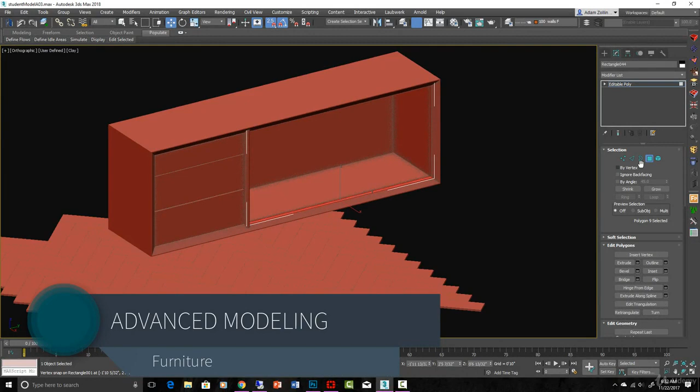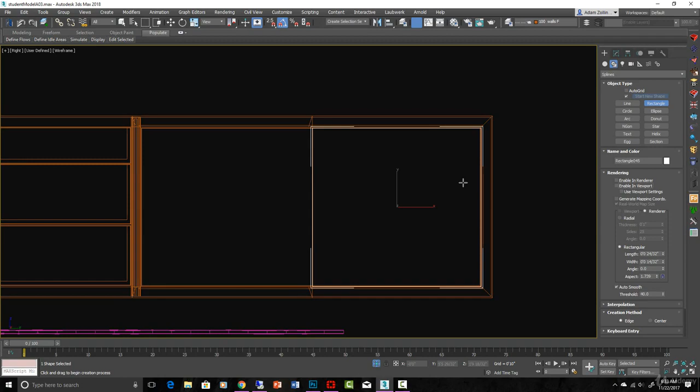All right, we were in the middle of putting on some doors. Let's do that, should be pretty easy. Let's look at our picture real quick. Okay, so we just have doors going each direction, simple piece of hardware, and then we just need to do the legs and we're there. It's a pretty simple piece of furniture to get started on, no organic shapes, everything is hard lines, but it's a great way to explore all the different poly tools.

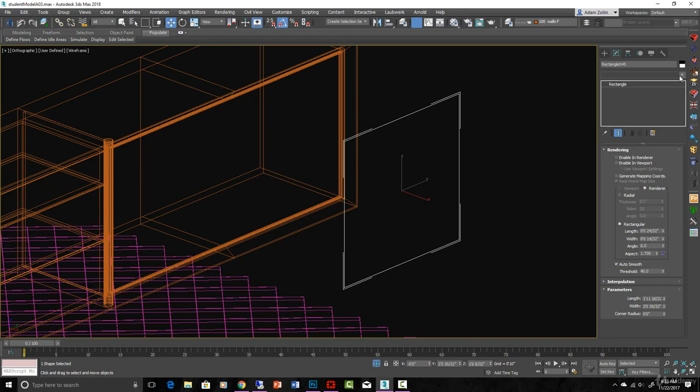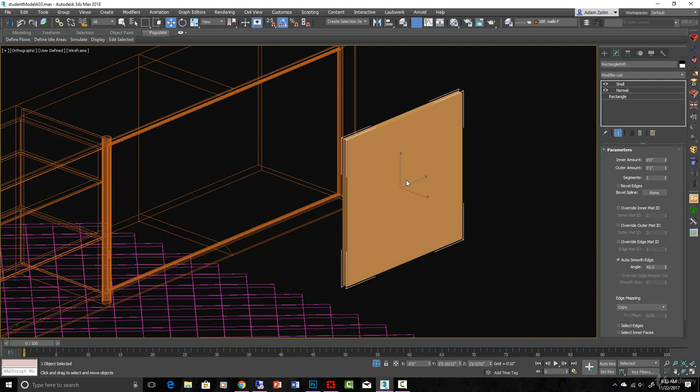I'm using spline tools to start my creations as well. So this is just a rectangle, and turn off the enable rendering in viewport and in renderer so that it's just a spline. Then there's a couple different things you can do: you can extrude it or put a normal modifier on it. Those are found in the modify panel. Let's put a normal on it. We don't want to flip the normal, we want it to stay that side, but that turns it into a shape. You could also just right click on a rectangle and convert to edit poly. Once it's just a face sitting there in space, we can put a shell on it, and there's our door. We also could have just extruded the rectangle to make a door, but either way, let's use that because it looks great.

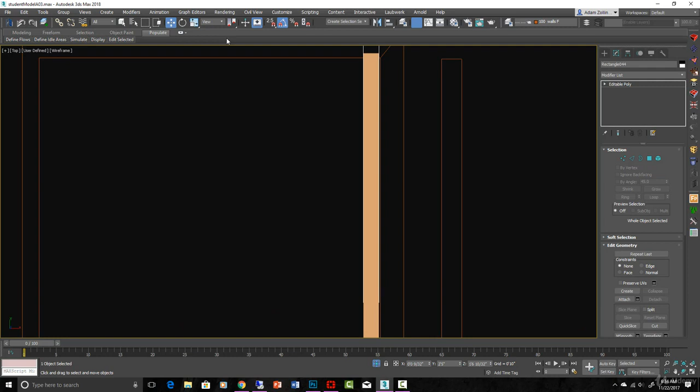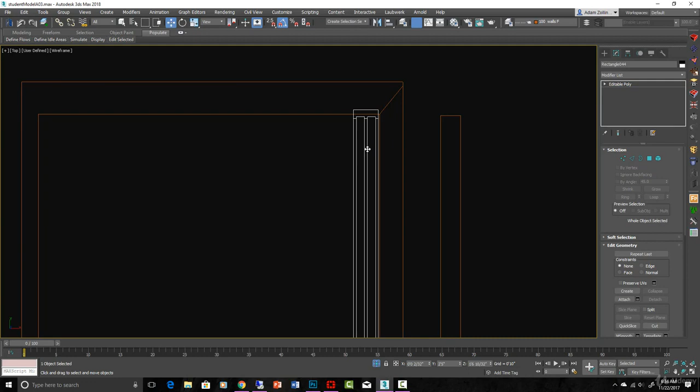Now it needs to fit into this groove that we made here, and I'm now looking at that thinking the door is not thick enough. So what we can do is, of course, just scale it. You could go into the vertex sub-object mode and select the vertices you want and stretch them over. I'm just going to scale it in sub-object mode in the x-axis only, like that, and then move it over into place. Make sure that door is thick enough.

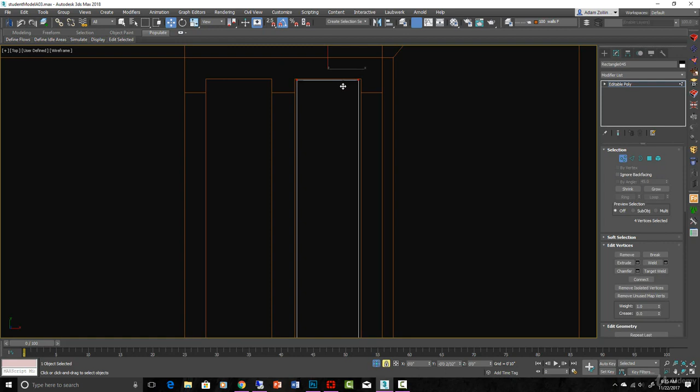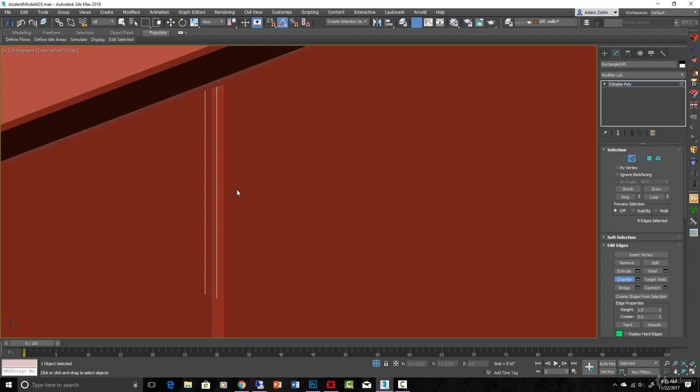That looks thick enough. Okay, so let's turn this door into an edit poly. Now we can make it the exact size we need and just put it into there. It can be a little bit smaller, so that it doesn't fit absolutely tight into that groove, because that wouldn't be right. Move it in the y-axis down, make sure it's just sitting right in there. Perfect. And we can again put those micro chamfers on the edge, just for consistency. Again, we went to the face, selected it, then control to the edges to select all the edges connected to that face. Just the slightest of chamfers.

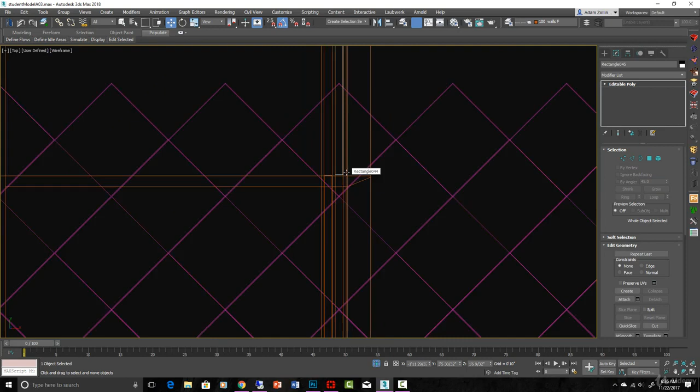And then we will hold down shift while we copy this guy over, and it should be an instance. Actually, you know what, it's probably not an instance. Well, maybe it is, I'm trying to figure out how it would work here in the center. You're not going to have a gap there, so this would be a little longer than to the halfway mark. And since these are instances, that one now just got longer over there. So if we just move that down like so, now we have some overlap there right in the center, which I think is exactly how it would work.

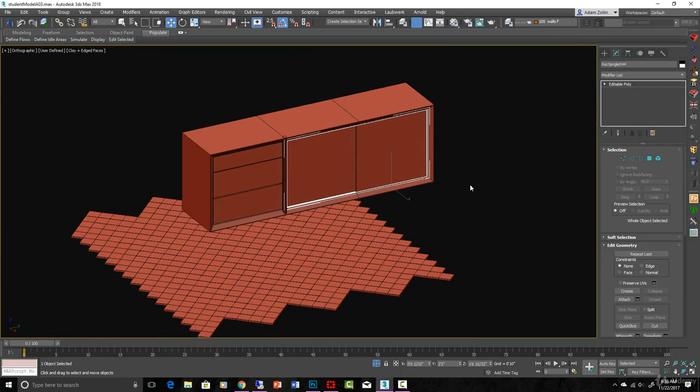There you go, we've got it sitting in a track. If anything, you could make that track a little thicker and the doors a little thicker too, but I think it's okay for now. We'll have to see when we render, I guess. Now the hardware is luckily super simple. You'll find that modern furniture is oftentimes much easier to model than traditional furniture because there's not a bunch of curves and things like that on it.

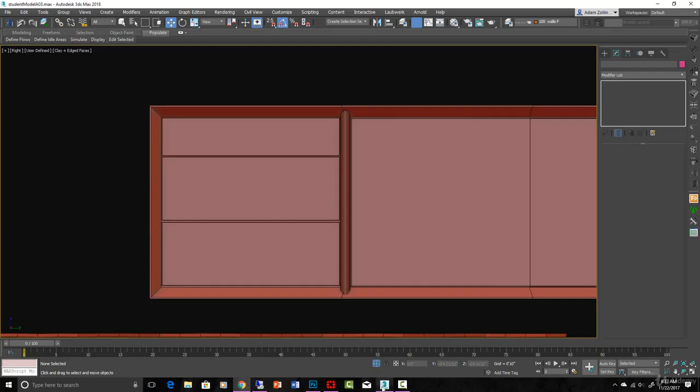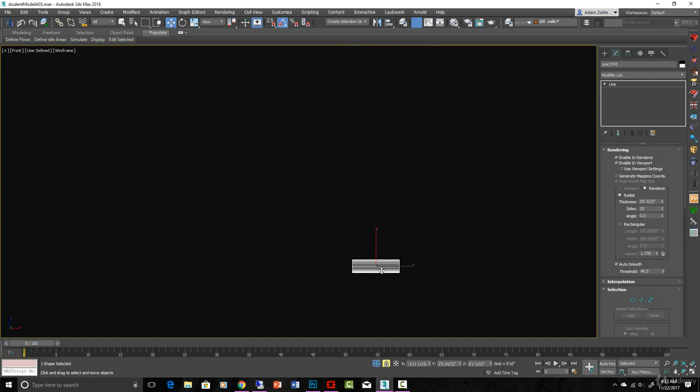Let's check this line right here to make sure that's right. Yep, that's right, the drawer goes right up to it. Okay, so the hardware can be very simple, we could probably just make that with splines. Let's take one of these doors to be right about there, and we'll just make a spline coming out like that. Let's look at it from the other view. Well, let's leave it down here so we can see it, and just go to the modify of that spline and enable it in renderer. Radial, of course, make it small, something like that. And then we can convert that to edit poly and take that as an element sub-object, and copy it up.

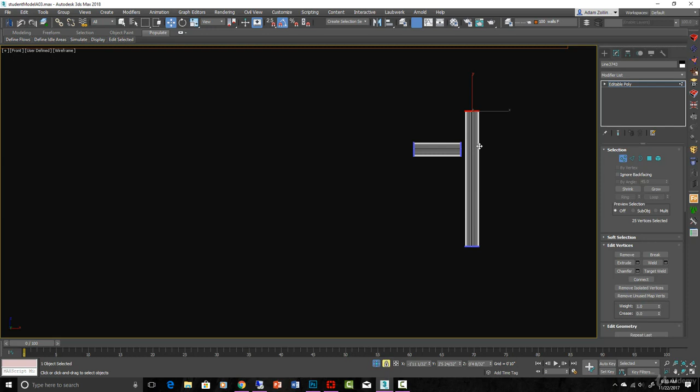And then let's move it out here, holding down shift to create a new element, rotating it 90. And now take it, move those vertices up, move those vertices down. And this handle is actually bigger in radius than these little stems that hold it on.

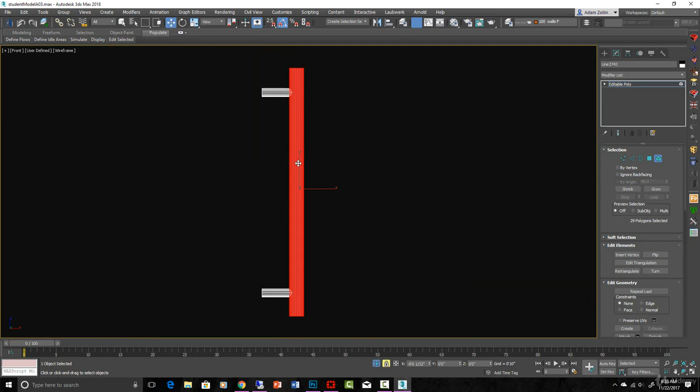So again, in just the XY axis, we will scale like that. Make sure and scale in sub-object mode, wouldn't work otherwise. Again, move that into place so that they're definitely overlapping. We've got a nice little overlap there.

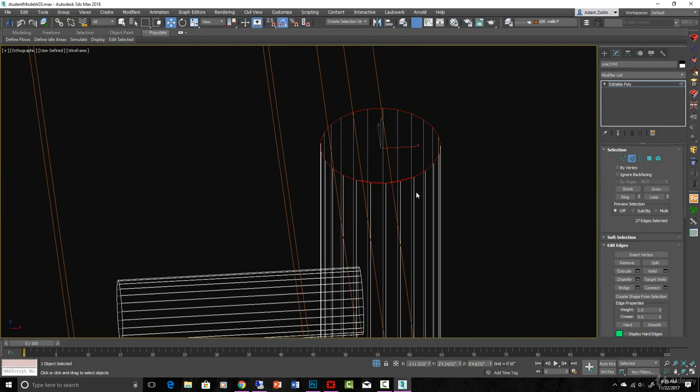Now in these ones, there's definitely a beveled edge. So we can do that by just selecting the face, holding Control. Actually, when you take a spline to create your polygons, it will get these faces down here that you don't want. So actually, it would have been better to do it as a circle extruded because that makes a cleaner end cap. I just went in there and selected those edges and hit remove, but that may or may not be clean when we try to do our bevel. I'll show you what I mean.

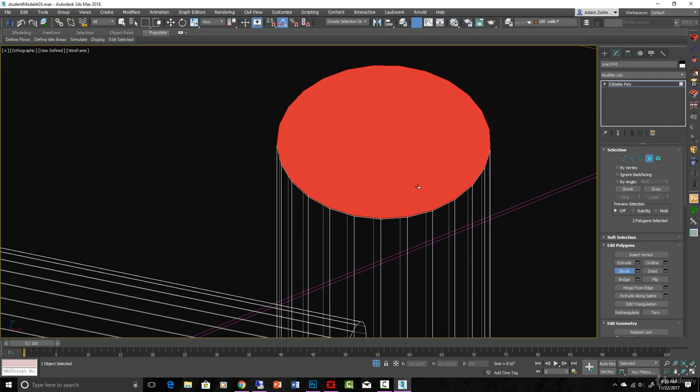Actually, so this time, instead of chamfer, we are going to use bevel. So let's just up and in for our bevel. Okay, and that should have happened on the bottom face as well. So that's perfect. We could have selected all those edges and did a chamfer, but instead we just selected a face and did a bevel, and it's nice and clean.

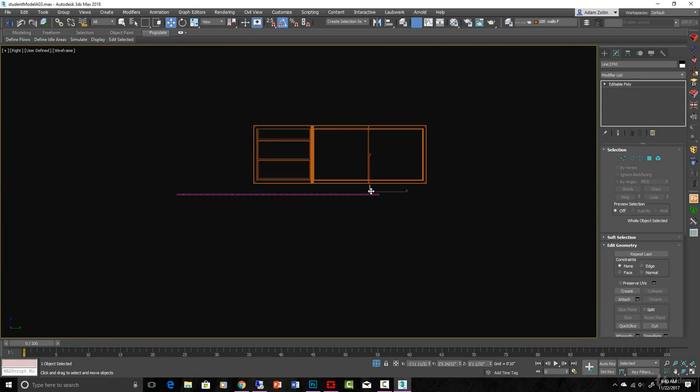Perfect. Now we move this handle into place, and we can see that it's already too small because I am not looking at reference dimensions. I'm just kind of eyeballing things, and that makes it too small. It's actually a pretty hefty little piece of hardware there.

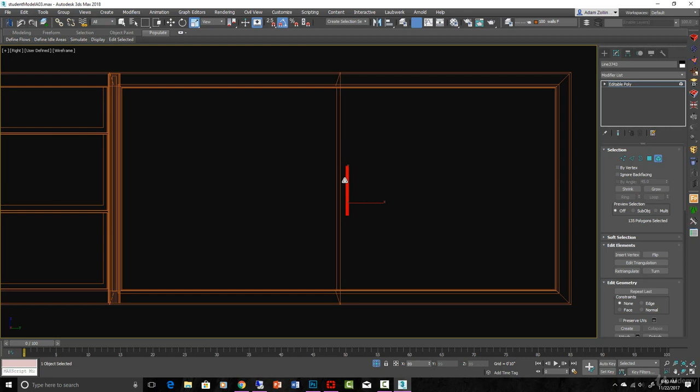So let's actually just scale the whole thing up in sub-object mode. Make sure we're scaling in all directions here. It's actually more like that, isn't it? And then let's see, let's make sure the radius is right, and then we can stretch the height of the whole thing. Like that.

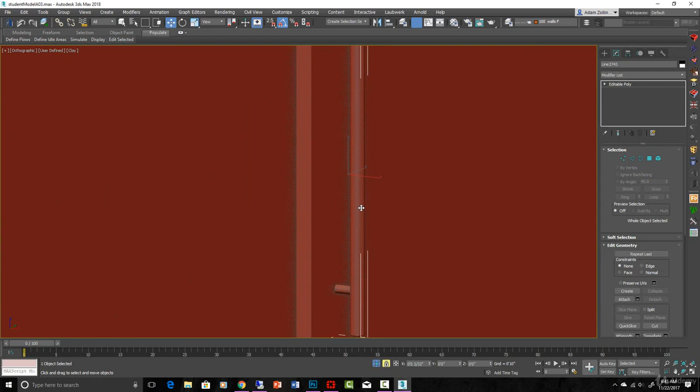Let's move these closer to the ends a little bit. There. So there that is. Let's move it out so that it's at the right place. Right about there. That looks close to correct, I think. Yeah, it's probably a little squattier than that. So let's make it a little squattier. Probably right there is what that looks like to me.

And obviously, if you have two monitors, I would suggest putting the piece of furniture up on your other monitor so you can just look at it while you're building. I don't have that luxury while I'm recording a screen.

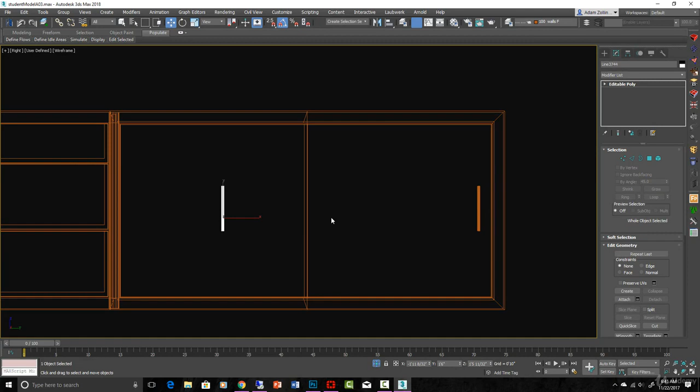Okay, actually no, we don't want to copy that in sub-object mode. We want to copy it just as an object. Yes, just like this, and make it an instance. Put it over here, move it into place like that.

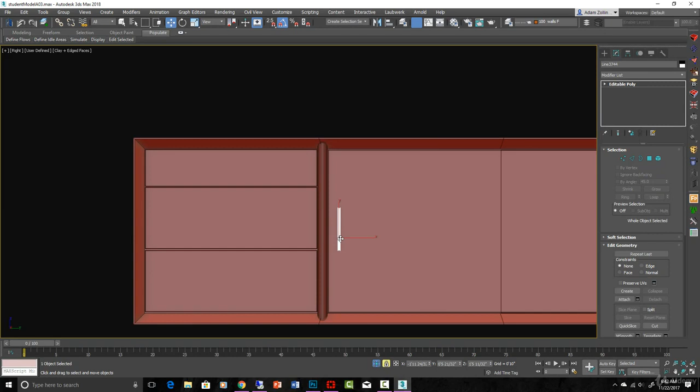Okay, if anything, those could afford to be a little beefier, but for now, we're going to accept that. And yay, we've got the same hardware on the drawers as well, so that becomes very easy for us, doesn't it? Small victories, especially when you're on deadline and under budget, or under the pressure of a budget, I should say.

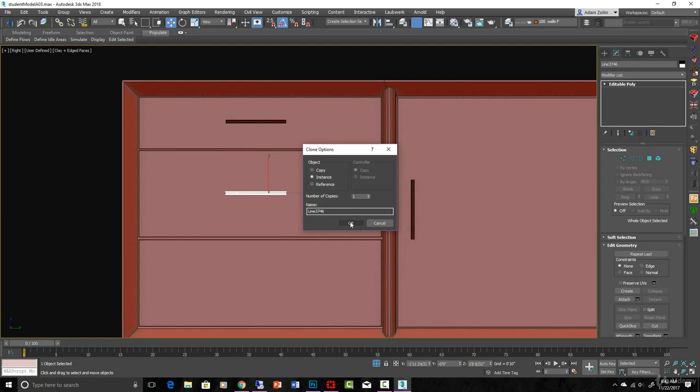Little things like that are great, because building furniture can be one of the most time-consuming things that you do. It's also one of the most fun, but it can kill a budget real quick if you're doing a bunch of custom furniture. Okay, we've got all this.

Let's cut to the legs. Okay, on the legs, these are going to be really simple. It's actually just a kind of a cylindrical leg at an angle and then just boards attaching it. So that's very easy. Let's create one and then instance it around.

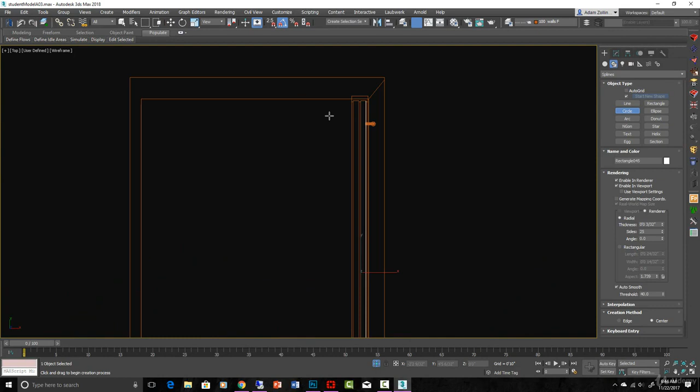It'll be a circle about that size, not enabled for rendering. Get it up here. We'll just do a basic extrude on it in the negative direction. Convert it to editable poly, our old friend poly. Okay, move the vertices up to the floor height.

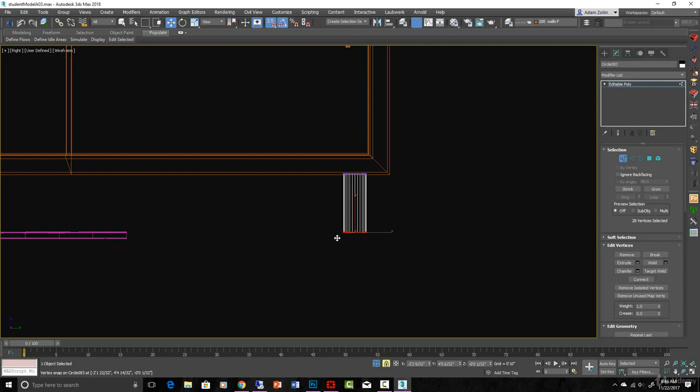And then we're going to take those same vertices and scale them down in the X and Y direction. Like that. Let's make sure that looks right. That's a little too tapered. Something like that.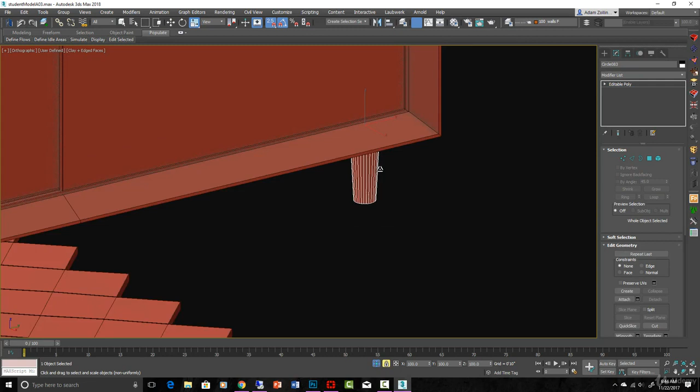Okay, and there's other ways to do this. You can make a cylinder and put a taper modifier on it. You could do that kind of stuff. That seems way more tedious to me. That's why I love these poly tools, because it just makes things quick and easy.

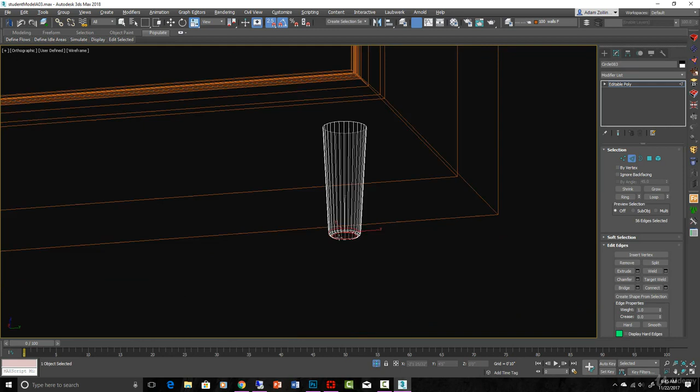This definitely has a chamfer on it, and we'll actually make it probably multiple chamfers to make it a little bit kind of rounded like that. So just turn up the chamfer edges to 3. Check mark. There we go. I think that's about right for that thing.

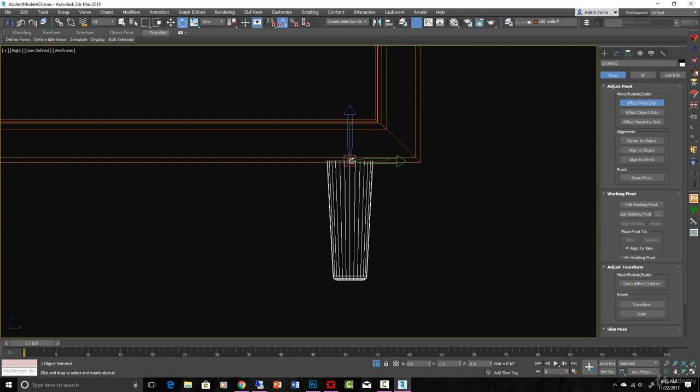Now, it just has a rotation on it. Fortunately, our pivot is in the exact right spot to rotate it like this, right? If it wasn't, then you could go into this tab here and go to pivot, affect pivot only. Then you could move it. So if you wanted to rotate it from here, you could do that, right? Rotate around the pivot. Make sure that you're in use pivot point center as your rotation point.

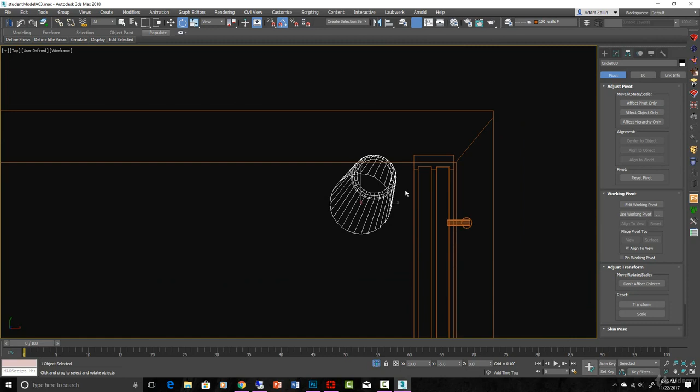But we actually want the pivot there, and we can rotate like that, and we can rotate like that. So it rotates in two directions, like so. The only problem is that now it doesn't quite intersect at the top. So let's actually, well, let's look at how this works here. Yeah, I've got too much tapering going on, and it's just kind of flat on the bottom. It's not actually a rotated thing. So let's undo that.

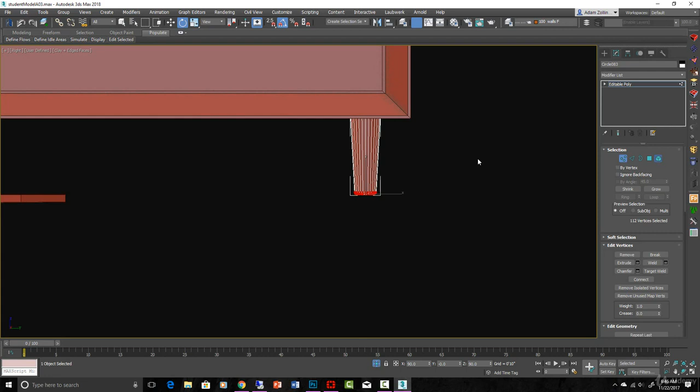This thing is looking too thick, first of all. It's much more slim, and I think it's got more of a shoulder on it. Let's do one line here like this. Scale that one out. I think it's more shaped like that.

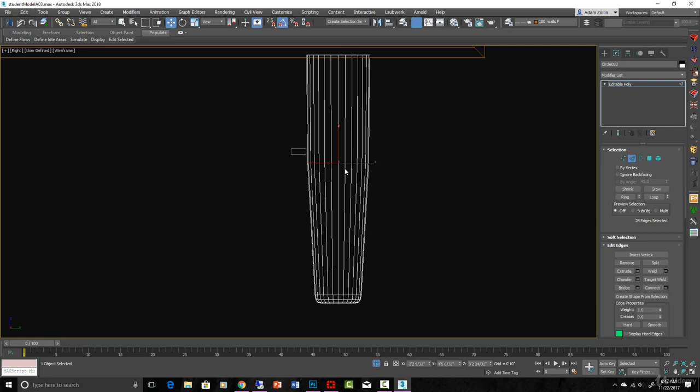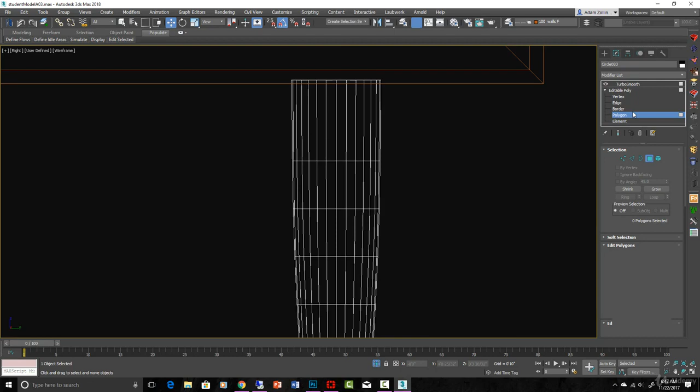You can either do a big chamfer on this to smooth it out, like that, that's good. You could also do a TurboSmooth on this to make it really, really smooth. But then you'd have to address the edges up at the top, which would be the easiest way to do that would be to just remove that face up there. Then the TurboSmooth won't try to round that corner, and it'll just stay flat like that.

Okay, now you've got a really high poly object, and it's going to look really smooth. And it's going to be hard to work with because it's got so many faces. So let's actually take that off.

I think what we could do here, how about we look at an FFD modifier for this? That'd be a pretty good modifier to use. Instead of rotating it, it actually kind of slides to the side.

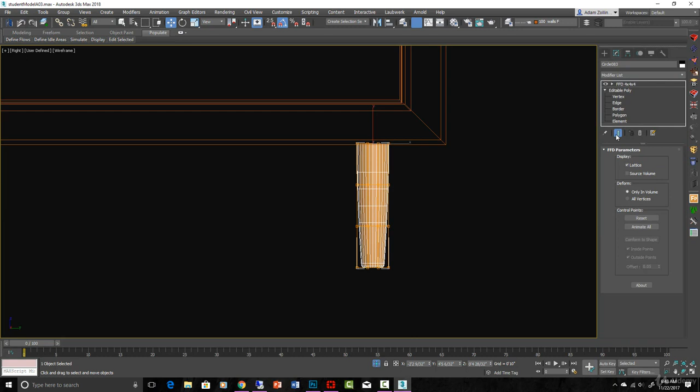So what we can do is an FFD modifier, 4x4x4 is fine. What this does is transform things without using transform. We go to the control points, and you can take those control points and kind of slide this thing over. So let's do that for each part of this.

Make sure it's kind of a straight line coming down. Now from the other side, we will do the same thing, making sure it's going out about the same amount. You can see how that does a nice little soft transform on our object.

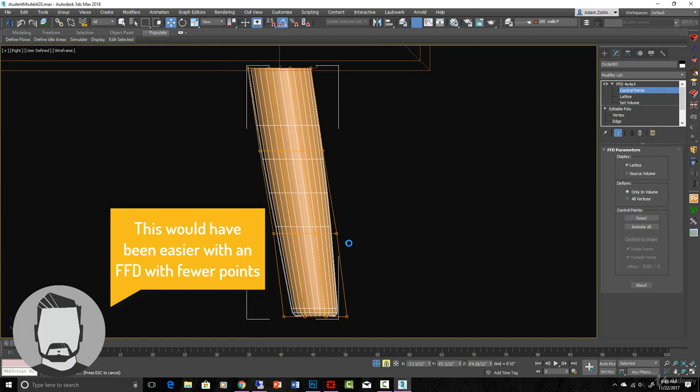This wants to be straight, so watch your control points and make sure they're coming down straight. I've got kind of a little shift in there, which I don't want. That's about right, and that's about right.

Okay, you can convert that to edit poly now, or you can leave it there so you can come back to it later. I'll just convert it. Does that look right? It looks close.

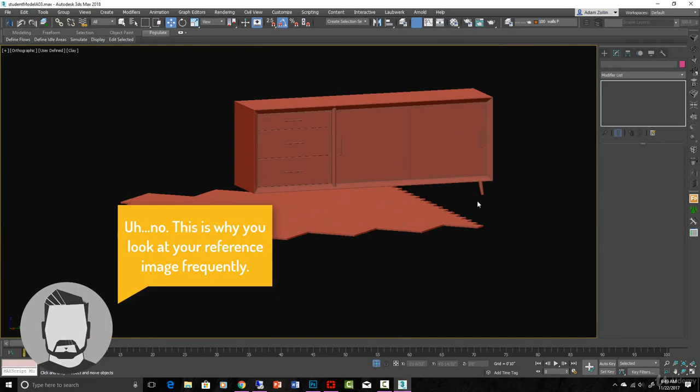Maybe it looks a little scrawny for this big thing that it's holding up. Maybe because I changed the proportions of the furniture, I should have made this leg a little bigger too. Or maybe we need to put a center leg in there, but that doesn't really fit the style.

Okay, so what I can do is just kind of scale it up in just the X and Y like that, and that definitely looks better. Okay, we will accept that.

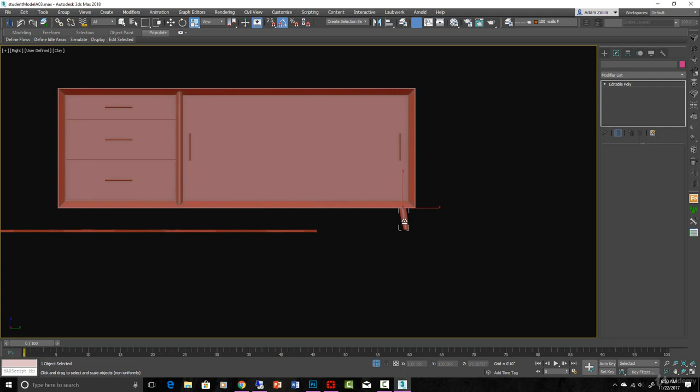Some little weirdness going on here. I don't really like the shape. I would go back and remake it if this was for a final project, but you guys have seen the tools, so we're going to move on. I think it'll still look really good in the render. It's more about demonstrating than making a perfect project here.

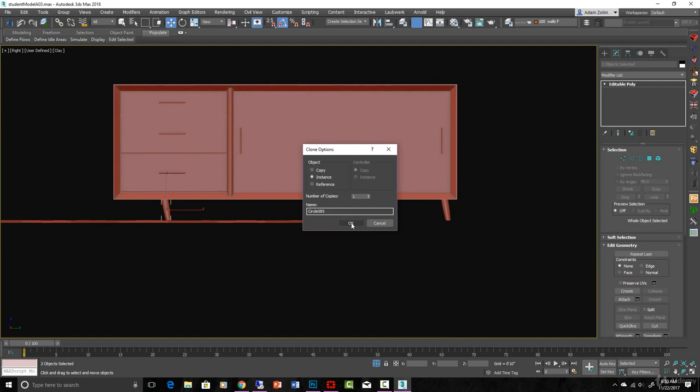Okay, now I'm just instancing them around, mirroring them. No clone for the mirror because I've already got the clones.

Let's make sure we get this distance right here by looking at the image. Yeah, it's pretty far off the edge.

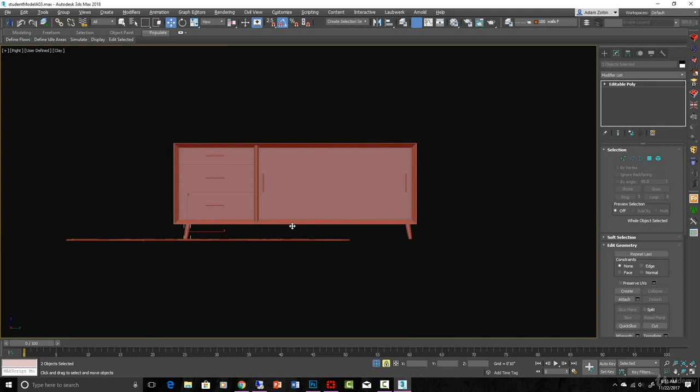One thing I have that's not going well for me is that these legs are long in proportion to the overall height of the piece of furniture. So I should have actually exaggerated these legs up, but because of the shape of my buffet, it doesn't really look the same. I could adjust that by

shifting all this up, but I'm not going to do that because it's not essential to the course. If we start rendering and I'm looking at it thinking that looks really weird, then it is essential to the course and we'll go back and fix it.

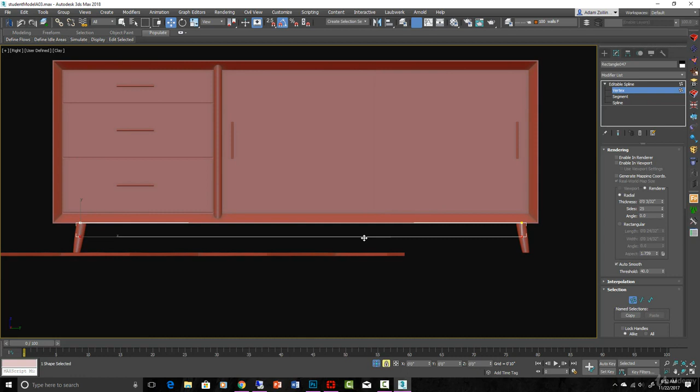But when you're eyeballing furniture, this is kind of the problems that you run into. It's making sure those proportions get just right. And I'm also adjusting the piece of furniture to fit my room, which means I have to kind of eyeball the proportions and see if they look right or not.

Okay, just building these last little pieces here. We'll finish this up by just doing some rectangles and extruding. Make that into an edit poly. Need one back here too. Actually, that should be an instance, of course. Okay, I'm going to finish this up, and in the next video, we'll move on to the next thing.